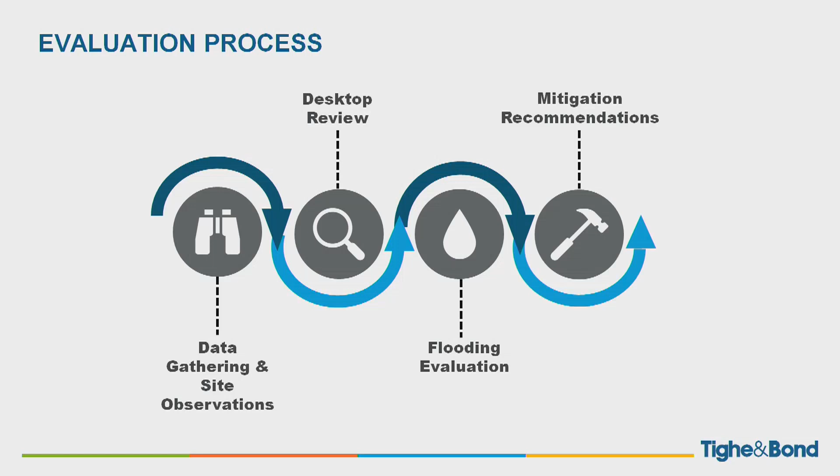So the study area is outlined here in the magenta color. North is to the left. So let me, here we go. All right, so you can see—

This is the Grove-Tilley area down in here. We have Interstate 95 here, railroads up here. So the watershed extends a fairly significant distance upstream.

It extends as far as St. Nicholas Road, which is over in here. And this area is determined by what contributes to the Goodwives River at Old Kings Highway South.

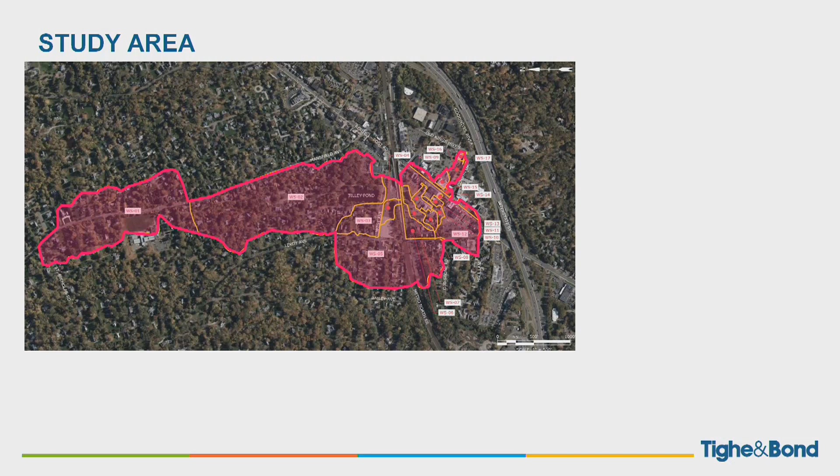The study area itself, everything within that magenta line, is a total of 461 acres. Like I said, it extends north to St. Nicholas Road, and then it includes most of the downtown area that lies between the railroad and Interstate 95. Obviously downtown also extends on the other side, but that's a different watershed.

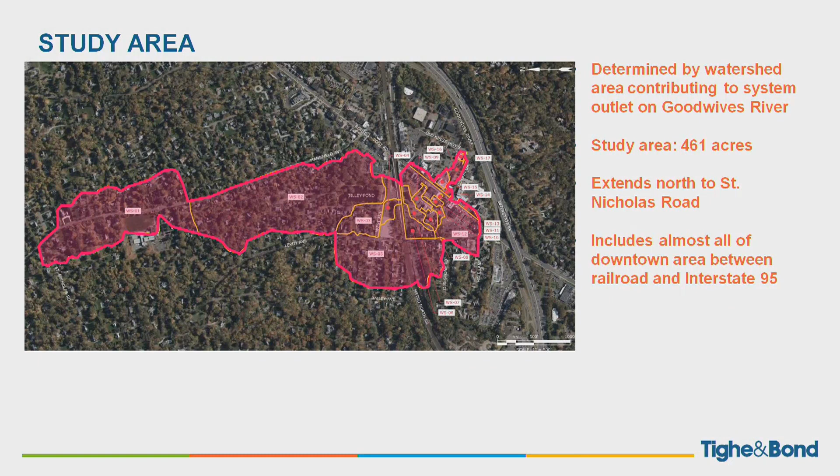So the data gathering consists of, it's like putting pieces of a puzzle together. Some of the things that we look at are the storm sewer maps. The storm sewer mapping tells us how the drains are interconnected, and the sizes of the drains.

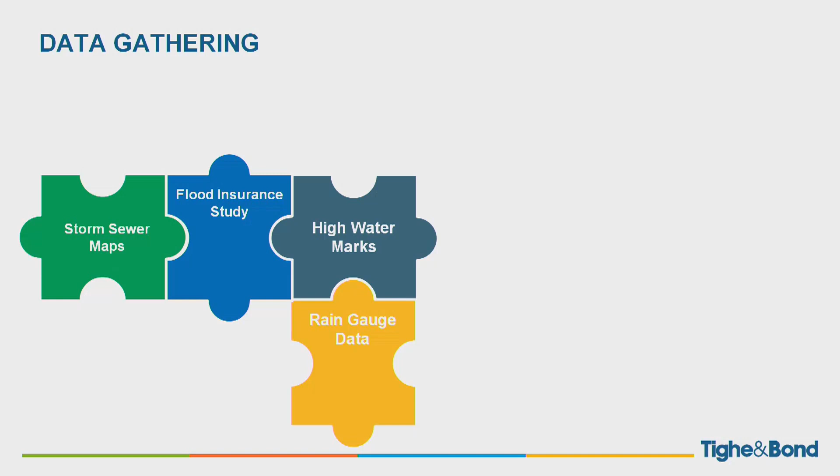We also look at the flood insurance study that FEMA publishes because that indicates areas that are susceptible to riverine flooding. We also look at high water marks to help calibrate the model to ensure that we can replicate a past storm event. We also take a look at rain gauge data to better understand, during the calibration process, how much rain has fallen.

So what kind of storm was it? Was it a 25-year storm? Was it a 50-year storm? Was it something else? We look at the underlying soils. If you have a loose, gravelly soil, you're going to get a lot more infiltration and less runoff than you would if you have a tight, silty soil.

We also look at photos of flooding. That helps us place where some of those high water marks are. There's also field observations when we go out in the field, things that we look at. This also includes videotaping of some of the existing storm drainage lines out there.

Tidal gauge data, not necessarily in this case, but we do need to take a look at the tailwater of the Goodwives River, because the system eventually drains to the Goodwives River. So we need to understand the relationship between the tailwater, how high the Goodwives River gets, and the Grove-Tilley drainage system.

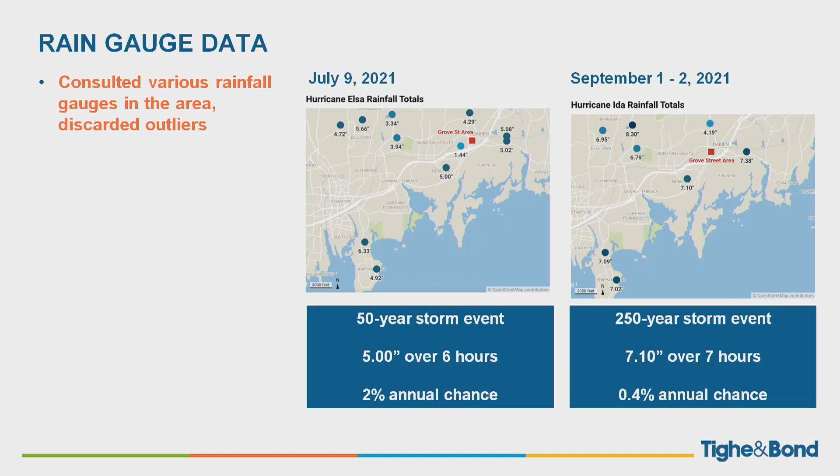So to get this information, we consulted various rainfall gauges from different sources, and we discarded the ones that just didn't seem to make sense. For example, you have 5 inches here, 4.2 inches here, but only 1.4 inches there—something tells me that gauge might have had some issue with it. So we discarded the highs and the lows.

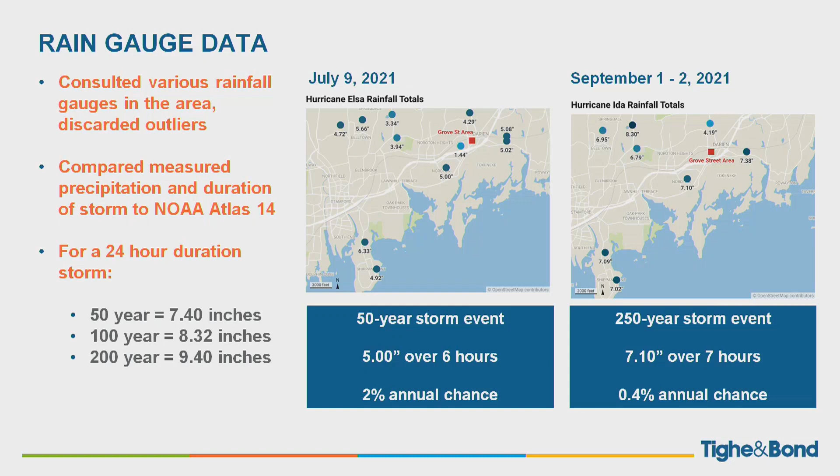And then what we did was we compared the rainfall gauge data to NOAA Atlas 14, which is a current standard that determines what storm event corresponds to what frequency of precipitation. Typically those are expressed in 24-hour duration, so we had to convert from one to the other. For comparison, in a 24-hour duration, 50-year is 7.4 inches of rain in that period, whereas 100-year is 8.32 inches in that same 24-hour period. That gives you a flavor of what it looks like expanded over a full day. And for further reference, 200-year is 9.4 inches in 24 hours.

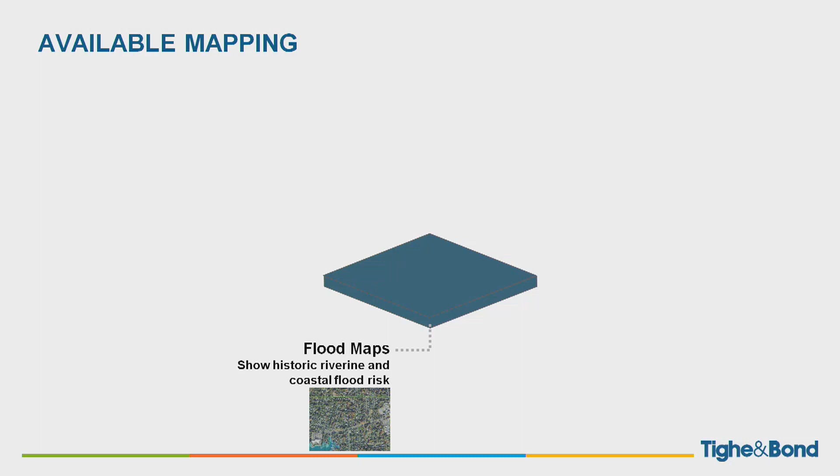So some of the available mapping that we look at include flood maps. The flood maps show riverine and coastal flood risk. We also take a look at soils mapping. The more porous the soil, the less runoff you're going to have, because that soil soaks up the rainfall, whereas if it's tighter, silty, or clay, it's not going to absorb as much, so you get more runoff.

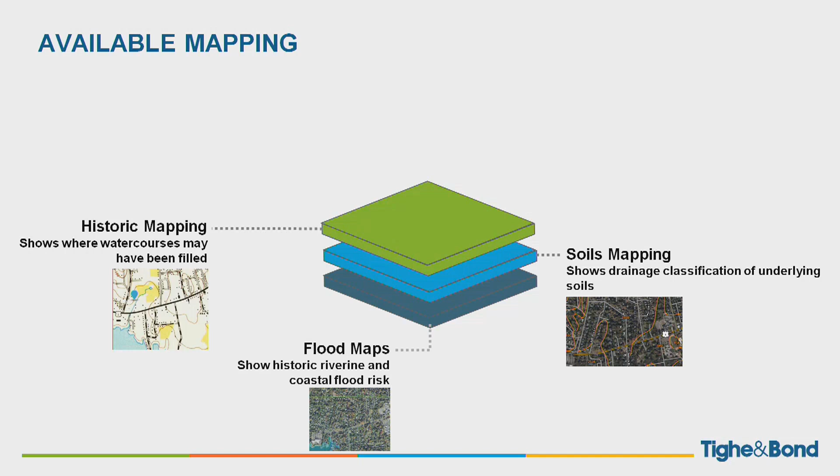We also have historic mapping. We look at USGS mapping, and those tend to show development patterns over time. They go back to 1893, so you can see how things have evolved, and how watercourses were relocated or filled in.

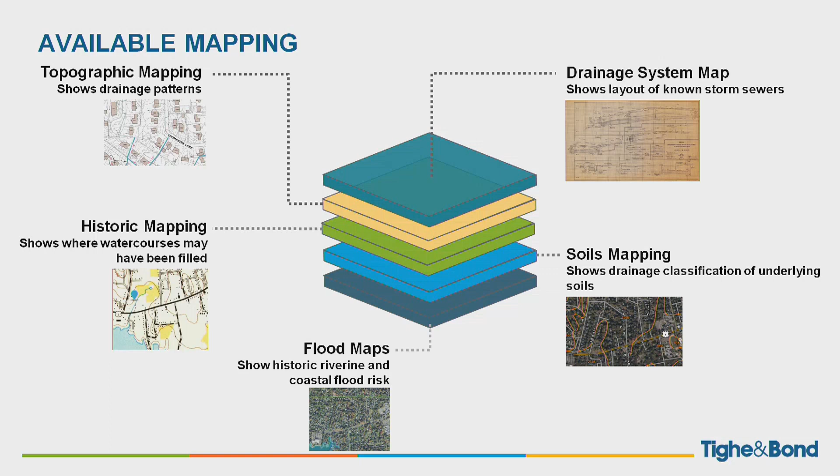And then we also have topographic mapping, that's watershed scale mapping, like the town's contour mapping. That helps us define the limits of our study, what the watershed is. We also have storm drainage system maps that DPW has, which identify how pipes are connected together, how the storm drainage network is built out. So those are the types of mapping that we factor into our analysis.

There is flooding there. The reason is, first, it's important to mention that FEMA's mapping doesn't represent future risk. It doesn't even represent current risk, it represents the risk at the time the map was generated, in this case 2013. And it only shows riverine or coastal flooding, it doesn't show urban flooding. When I say urban flooding, that means drainage from your storm sewer systems, it doesn't map that type of flooding.

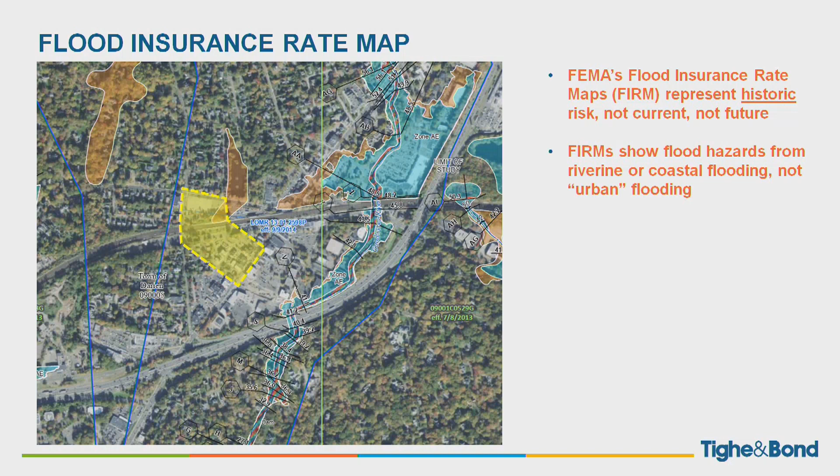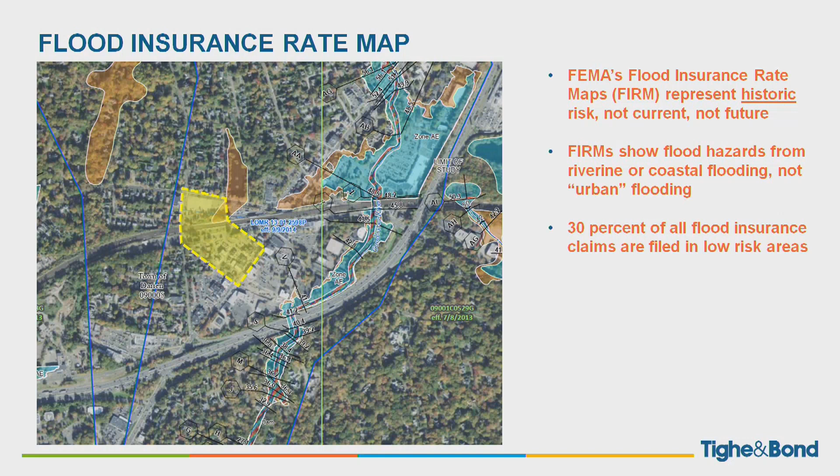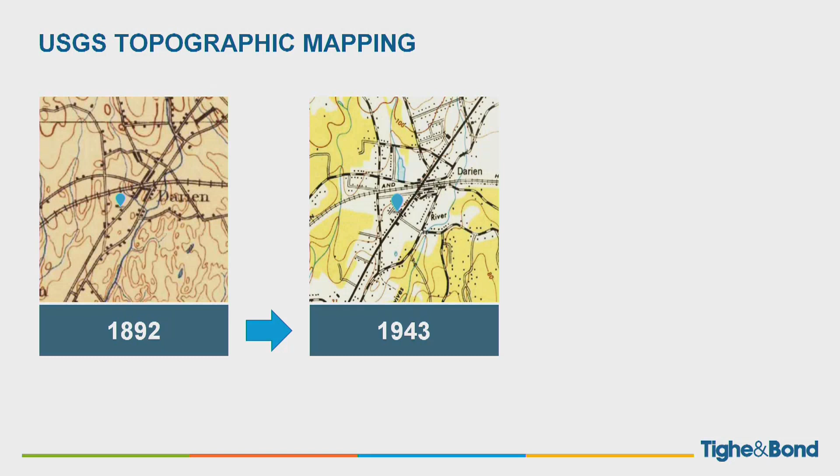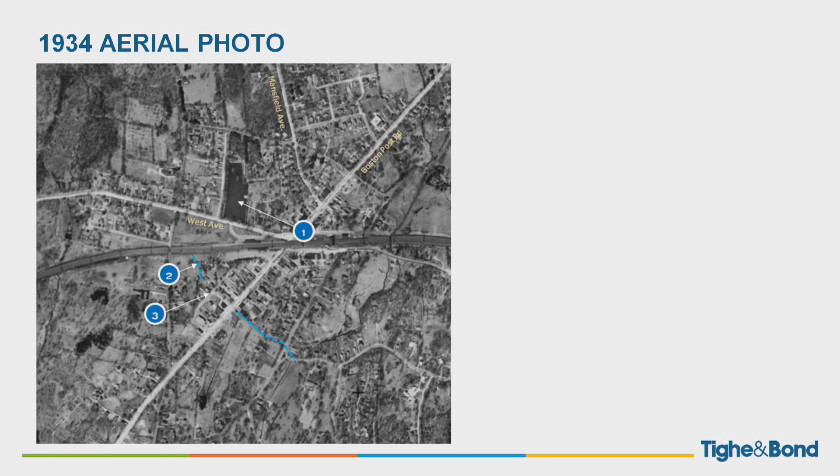And then what we also look at is some of the aerial photos. This is an aerial photo from 1934, the earliest available from the state archives. You'll see a couple of features here: one is Tilley Pond, right there. The second is there's a short section of watercourse that comes out from beneath the railroad - West Avenue is over here, and you'll see it comes through here. Number 3 is actually the Grove Brook Street intersection. This dotted line represents the watercourse, it does come a little bit further down. So it looks like that culverting happened sometime between 1934 and the 1940s.

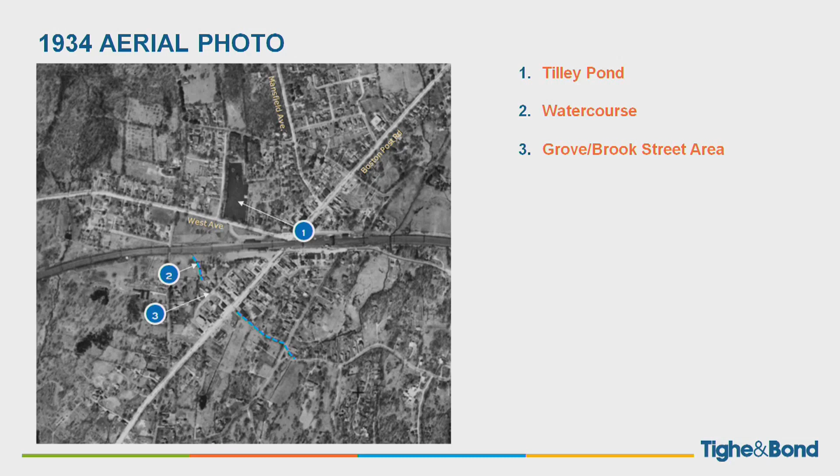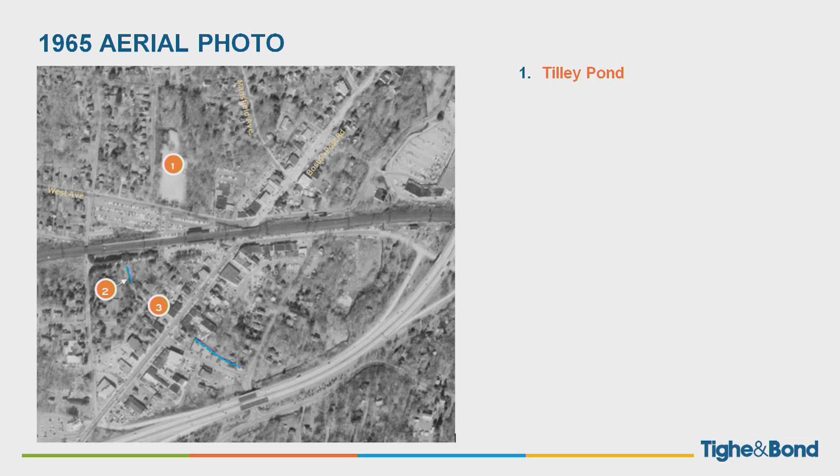So now take a step ahead at about 31 years. It's 1965. Again, number 1 is Tilley Pond, and you can see the West Avenue parking lot here. We've got the railroad, and we still have that short section of watercourse, then it disappears, so it's culverted, with a little more filling down here. So 1 is Tilley Pond, 2 is the watercourse, and 3 is the Grove and Brook Street area.

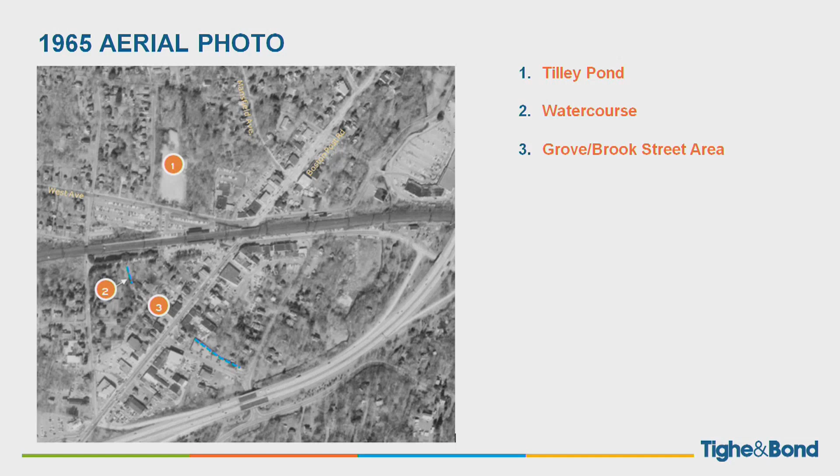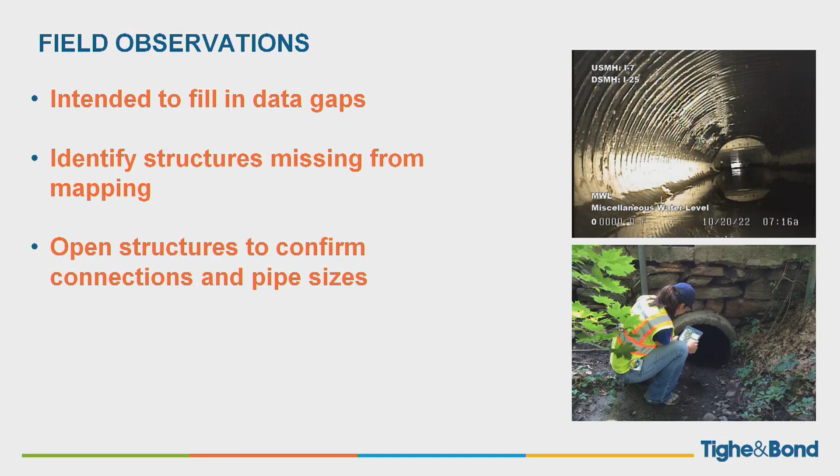The other thing we did was send engineers out in the field to do some observations. We have the mapping, but there are always data gaps that need to be filled in by looking in the field to see what's really going on. That includes identifying structures that might be missing from the mapping, or opening certain structures to confirm connections and pipe sizes, just to see how things are connected if there's a question. Also, in some cases if it's not clear which way things are flowing, we measure down from the top of the manhole to the bottom of the pipe at a couple locations to get a sense of how things flow.

Also, in the upper right, we did some pipe video inspection as well. That didn't turn up anything unusual. There weren't any weird blockages or anything like that.

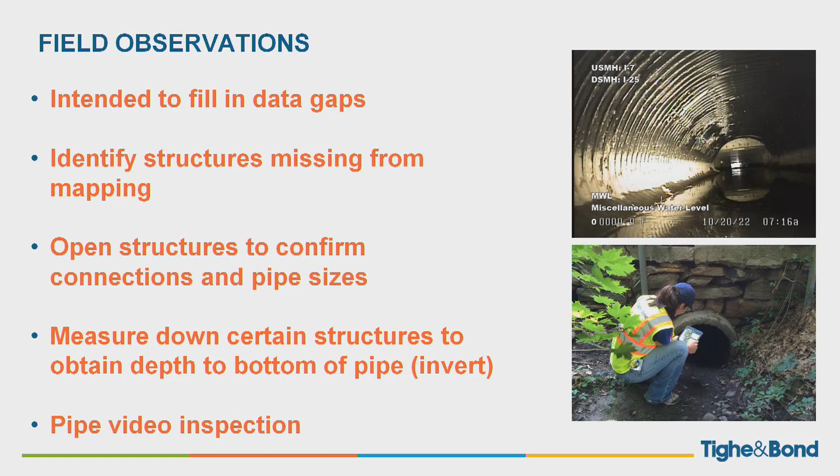So the existing drainage system—I apologize, the background doesn't show up that well, but don't worry, north is to the top. Post Road cuts across here, 95 is down here, Goodwives River is down here, West Avenue is up here, and Tilley Pond is here.

Once it's south of the railroad, it discharges into a short stretch of open channel. I should also point out there's a short stretch of open channel on the north side of the railroad crossing as well.

That is then piped as a 34 by 53 elliptical pipe, opens up into an open channel, and once it gets out near Grove Street, it's piped first as a box culvert, 2 feet high by 5 feet wide, then again down Grove Street as an elliptical pipe, crosses the Post Road, and continues towards Goodwives River, enlarging to a 73 by 44 inch arch pipe, then a 2 by 6 box, and finally twin 29 by 45 inch elliptical pipes.

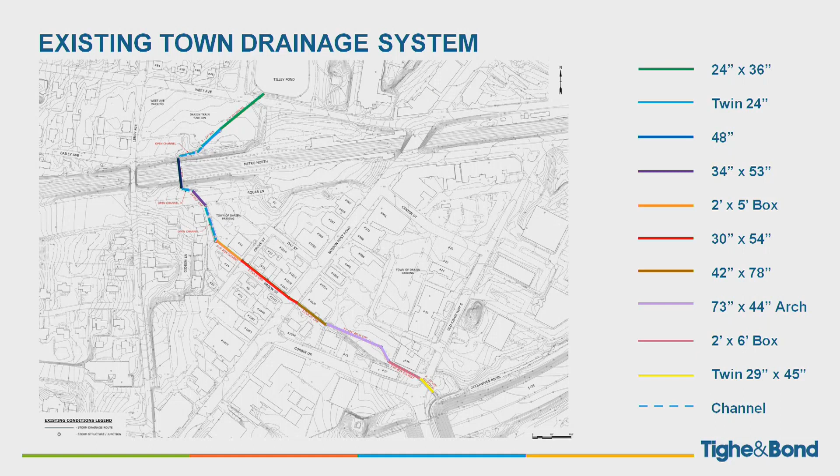So it's definitely an interesting collection of different pipe sizes that in general increase as you move from upstream to downstream, so there is increased capacity.

Based on this information, we have an idea of how the pipe system is connected and know the directions things flow, so we can start to build the model. What goes into that is the information on the drainage system. We look at the watersheds contributing to various parts of the system—we don't look at it as one big lump sum, we break it up into little pieces and then combine them. We start to build out our hydraulic model.

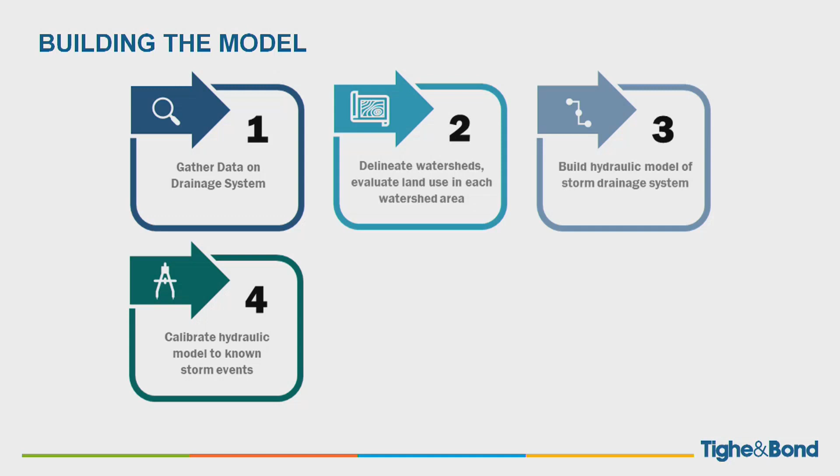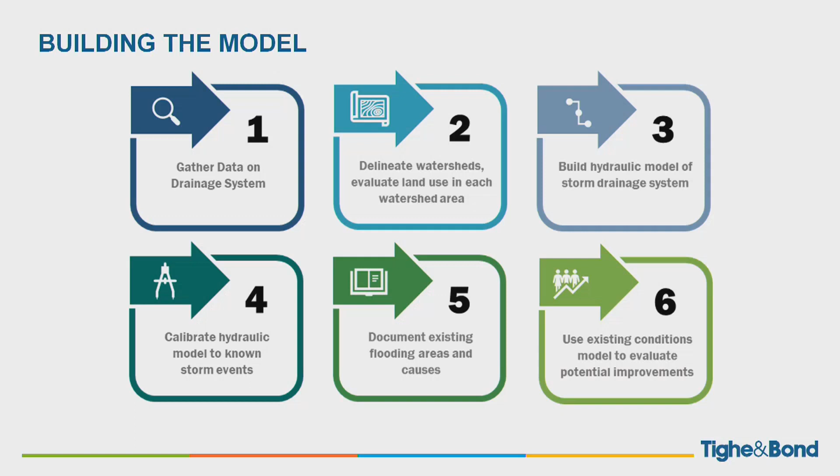Then we calibrate it to known storm events, to make sure it reflects those two storm events we discussed. Then we document the existing flooding areas and potential causes. Using that existing conditions model, we build on that and make modifications to represent potential improvements—maybe we swap out a pipe size, or redirect a pipe elsewhere. That's the kind of thing we do.

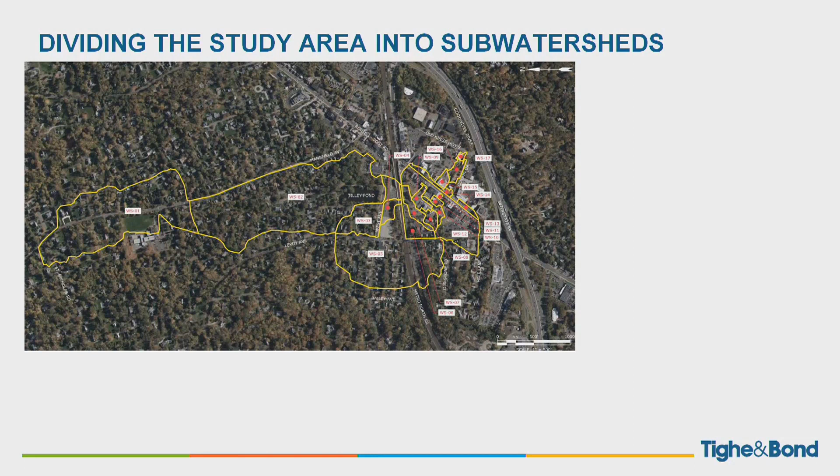So what we did was divide the study area into different watersheds. You'll see those outlined here in the different areas of yellow, just to get a better idea—you have branches that come into the mainline system. That way, if you see something change along the mainline system, you can go back and isolate it to one of these particular smaller subwatersheds. It was divided into 17 subwatershed areas, and again we use that to help isolate where certain problems might be, narrowing down potential problem areas.

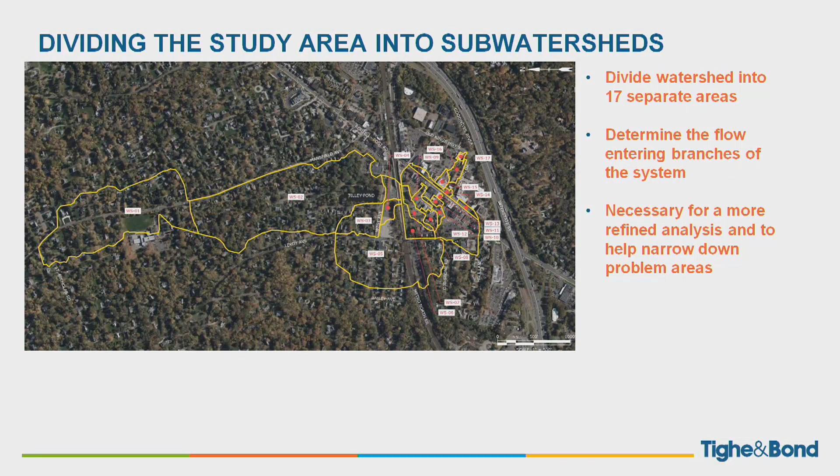Some of the things we look at when we look at these watershed areas are the amount of impervious cover. For example, the more pavement you have, the more runoff you have. So that's something we look at.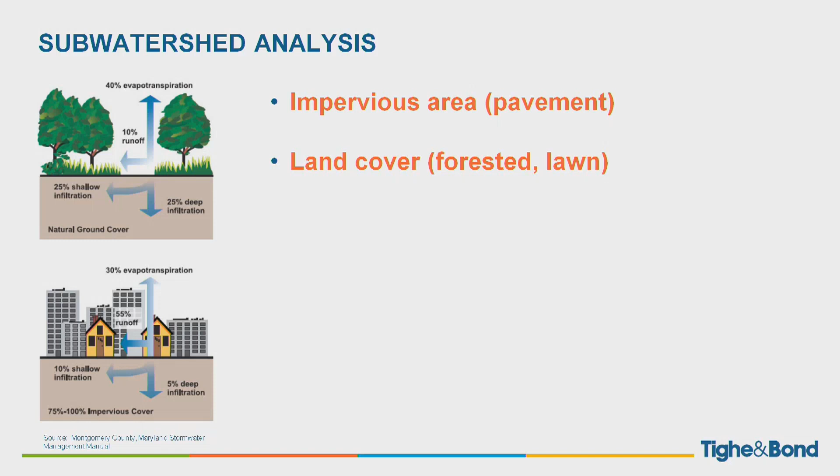We also look at what the land cover is, whether it's forested versus lawn, because those have different runoff characteristics. We also look at the underlying soil types - is it porous, or is it a tight, silty soil? All that influences how much runoff you're going to get in a particular area.

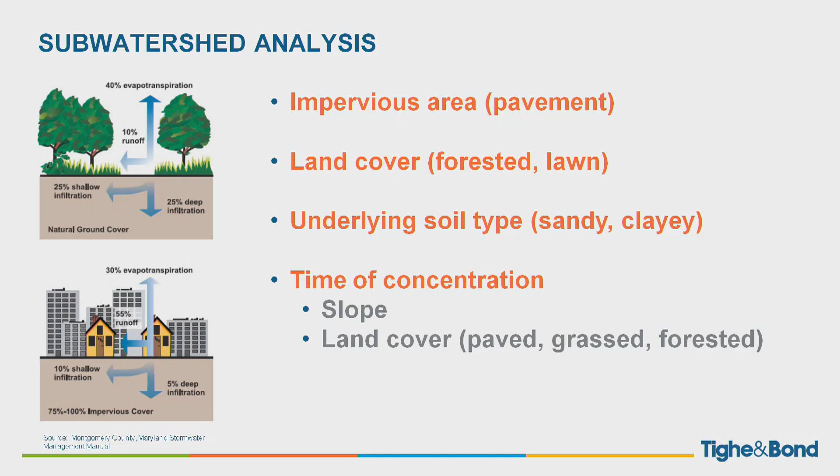And then we look at what's called the time of concentration, which is basically how long it takes for that entire subwatershed area to start contributing flow to the lowest point in that subwatershed. That's based on a couple things: slope - the steeper something is, the more quickly the runoff gets there - and land cover. If it's flowing across pavement, it moves more quickly as opposed to flowing across a forest floor, for example.

Just to clarify, when I say hydraulic model, it's a computerized model based upon different equations and methodologies that have been developed by the Army Corps of Engineers. So it's not like we're gluing things together.

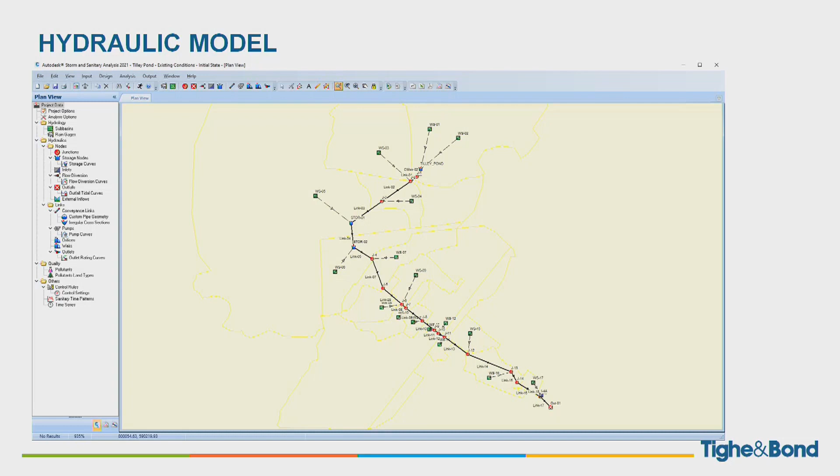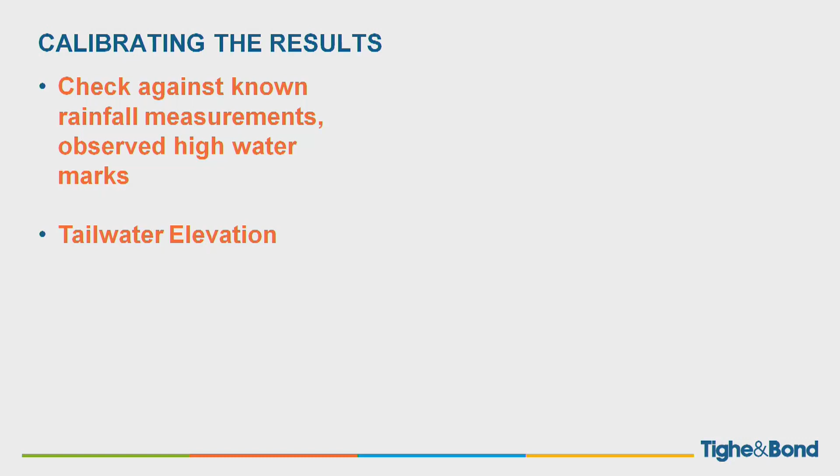It's all electronic. In calibrating results, we check against known rainfall measurements and observed high water marks - how high things got, how wide the flood was. One of the things we also take a look at is the tailwater elevation, to see what the potential condition of the Goodwives River would have been at that particular point in time.

We also take a look at something called antecedent moisture conditions, which is basically how much rain has fallen in the past week to 10 days. Because if soil is super saturated, like it's been raining the past couple days here, the soil isn't absorbing as much runoff as it would under normal conditions. The flip side - if you have a summer like a year or two ago where it was super dry, your soils are going to absorb more runoff than typical.

So that's something we take a look at, and we adjust our runoff coefficients during the calibration process to match what the antecedent moisture conditions were during a storm event. And then we take a look at how well the results align - are we comfortable with the depth and extent of flooding we're getting under existing conditions? And then can we move on to the next step and start making recommendations?

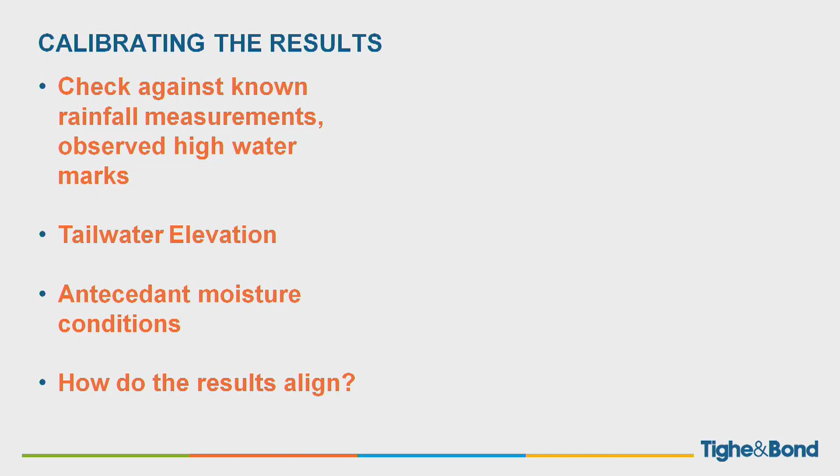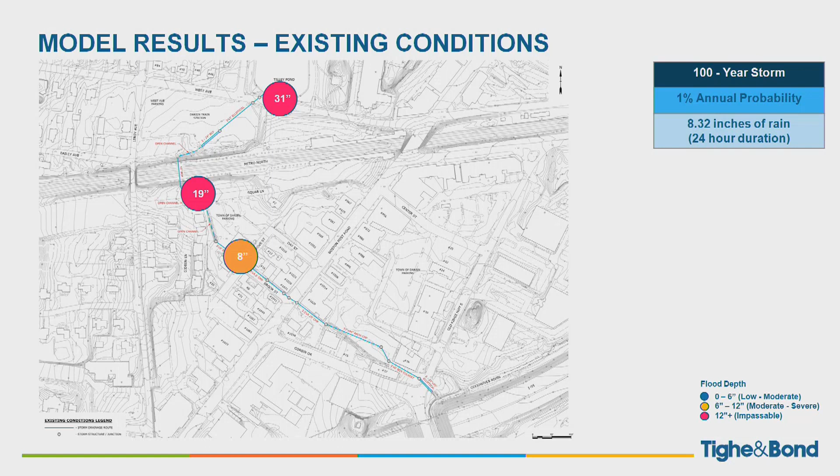So some of the key takeaways looking at the existing drainage system: the system can overtop at a 2-year event. The town's typical design standard is a 25-year storm, and with 50-year design for low points and culverts.

There are multiple choke points in the system, right? There's some inconsistent pipe sizes. You could see there's a lot of hydraulic loss by going from open channel to pipe to open channel to pipe back to open channel again.

The other thing that's a challenge is increasing precipitation depth and frequency, right? We're starting to see more severe storms. We're starting to see greater precipitation depths, and general storms are becoming more intense.

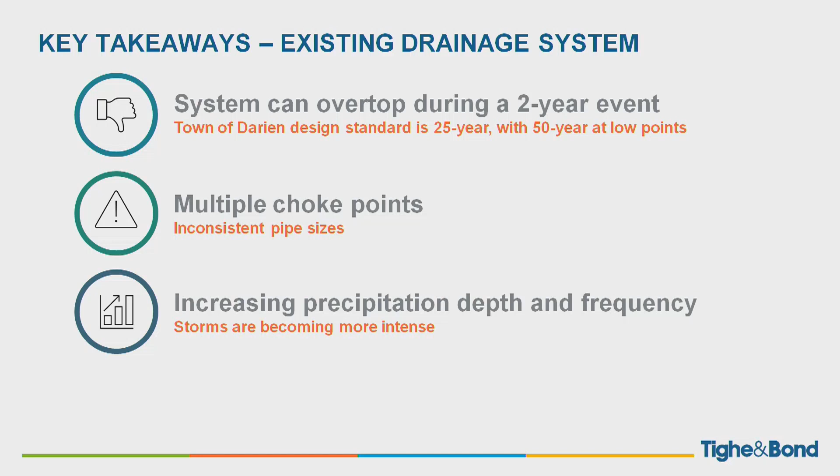But there's also some opportunities for improvement, right? Through our investigation, we found some ways to make the system more efficient, to reduce those flood depths and conform to the current town drainage requirements.

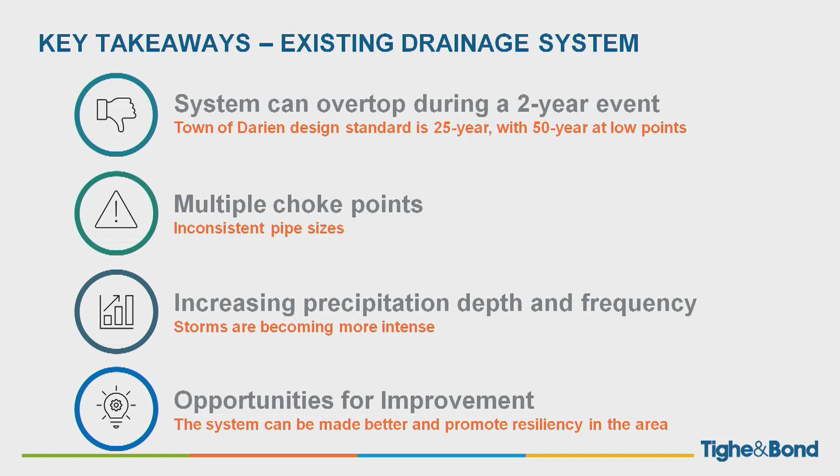The other thing that we're seeing too is the intensity of the storms, right? These are days with rainfall exceeding 1 inch in Bridgeport, and you could see a lot of the peaks have been all within the past 10 to 15 years.

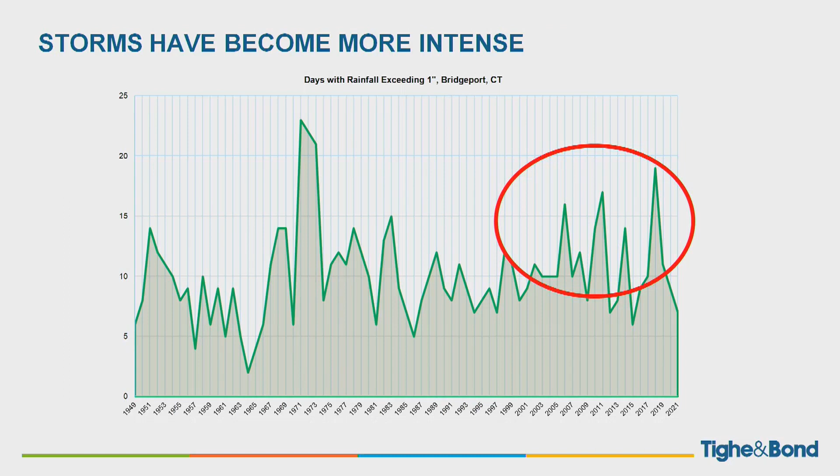Another thing that we're seeing is that tropical storms tend to stay around longer. What appears to be happening is that the forward speed is slowing down, allowing the storms to hang around longer, and the longer they hang around, the more rainfall that they drop.

This table is in our report and identifies some of the more recent events too, along with their speed. But you can see as speed decreases, the precipitation has been increasing.

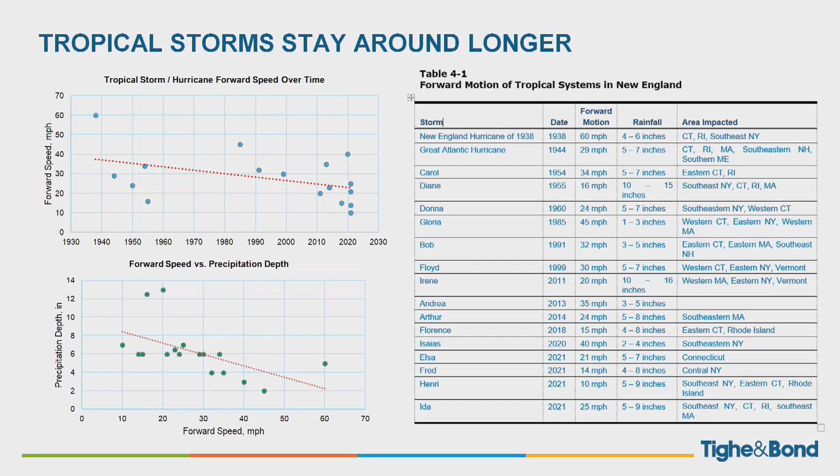Overall, New England is trending wetter. Obviously forecasts are all over the place, but on average, we're looking at a 13% increase in rainfall here in New England by mid-century.

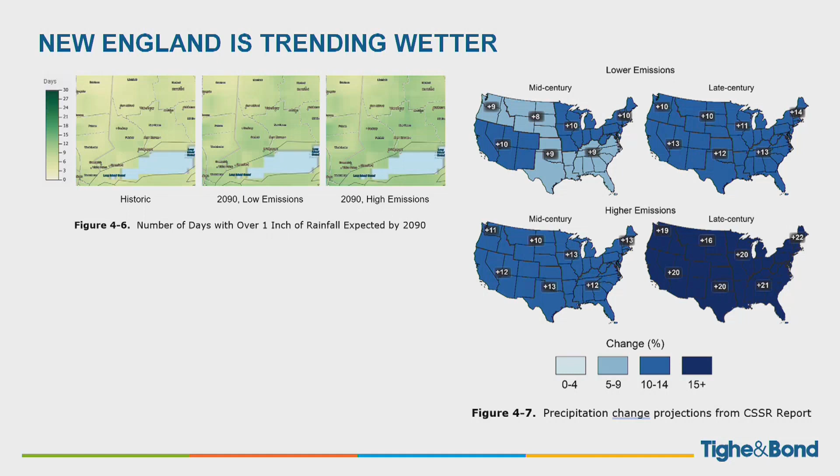Another thing that's happened since the drainage infrastructure was installed or modified is that the drainage criteria has changed. When I first started in 1994, we had used data from the 1961 technical paper number 40 by the National Weather Service. There, the 24-hour storm duration for this area, the 50-year would give you 6.5 inches, and 100-year would be 7.20 inches.

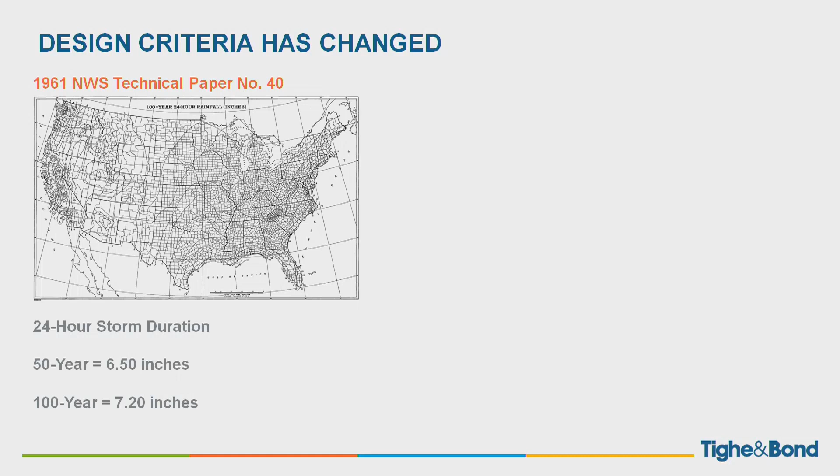That was updated in 2014 based upon the 50-plus years of additional record that was available at that point. In 2015, NOAA came out with its Atlas 14. A 24-hour storm duration for a 50-year event is now 7.4 inches, and the 100-year is 8.32. So basically, the old 100-year storm is now the current 50-year storm, just to show you how things have changed.

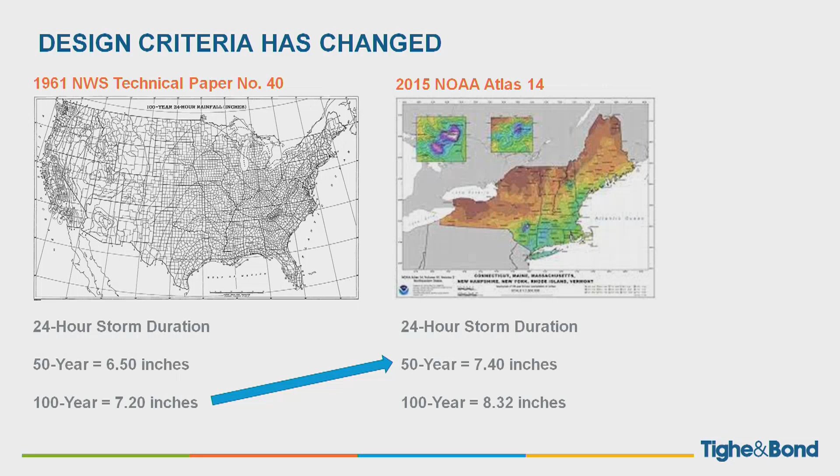So some of our study recommendations. As I go through these, I want to make sure we understand the difference between some of the terminology I use. I tend to talk in a lot of technical speak, but when I talk about concrete pipe, what I mean is reinforced concrete pipe. It's your traditional round pipe, what you'd think of as pipe. It's readily available, easy to install, and it's a lower cost.

You also hear me talk about concrete box culverts. As you would think, the concrete box culvert is rectangular, the shape of a box. Those have a longer lead time, it takes longer to get them. They're more challenging to install just because they're bigger, they have to be winched together. But because it's not round, it provides some additional capacity for the same height. You can get more flow through those.

Again, a little bit more about reinforced concrete pipe. This is the round pipe, a rounded cross section, and it's easier to get. You also heard me talk about elliptical pipe, some people also call this squash pipe. It's an elliptical cross section where it's basically round, but it has a wider span than it does a rise going up and down.

This is often used in areas where there are utility conflicts, if you have to get over or under a certain utility, and also where you have limited cover, because pipes require a certain amount of earth or cover on top of them to avoid damage. So sometimes these are used in those situations, and those are a little harder to obtain than the reinforced concrete pipes.

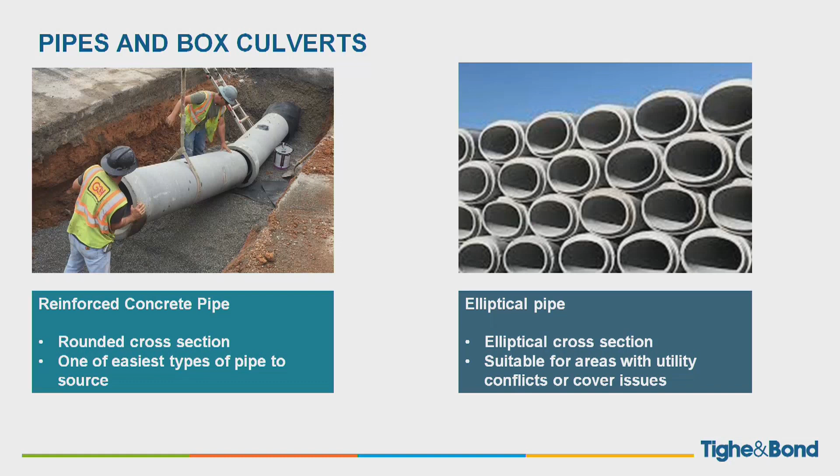So alternate one that we looked at was removing the pipe connection between the two segments of open channel immediately south of the railroad, and then installing a new 38-inch by 60-inch pipe. So that's elliptical, the oval cross-section, coming down Squab Lane, down Day Street, taking a quick jog down the Post Road, working through the Darien Thrift Shop property, and then working its way out toward the Goodwives River.

And what that was, we're looking at a 50-year design event, 2% annual probability, 7.4 inches of rainfall. What we're showing is in the lot, it goes from 27 inches under existing conditions to 18 under proposed. And down near Grove Street, it goes from 16 to 2 inches. So that's a pretty significant improvement, but 18 is not great.

So then we looked at alternate 2. This one, again, is all a 50-year design, which is a town standard. It's at 7.4 inches. What we did look at was removing the pipe. Instead of running it all the way down to the Goodwives River, we looked at running it to the Post Road to meet the existing drainage main line. And the results were actually worse here, which we kind of expected.

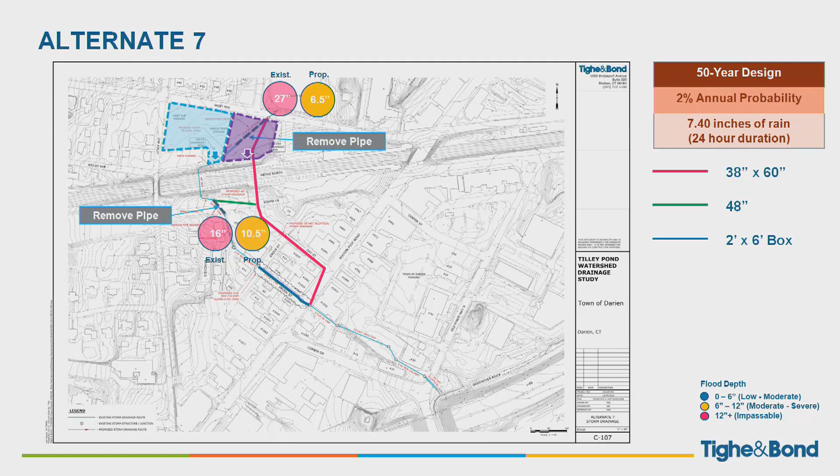And then alternate 8 is where we finally landed, which includes splitting the lot, new drainage pipe, 38 by 60, making its way all the way down to the Goodwives River, basically similar to alternate 1. Removing the pipe that connects the 2 sections of open channel, piping that open channel into the new drainage system, and improving the pipe on Brook Street. And then we're also removing this pipe up here. So we've got 2 fully independent systems when you're up at the lot.

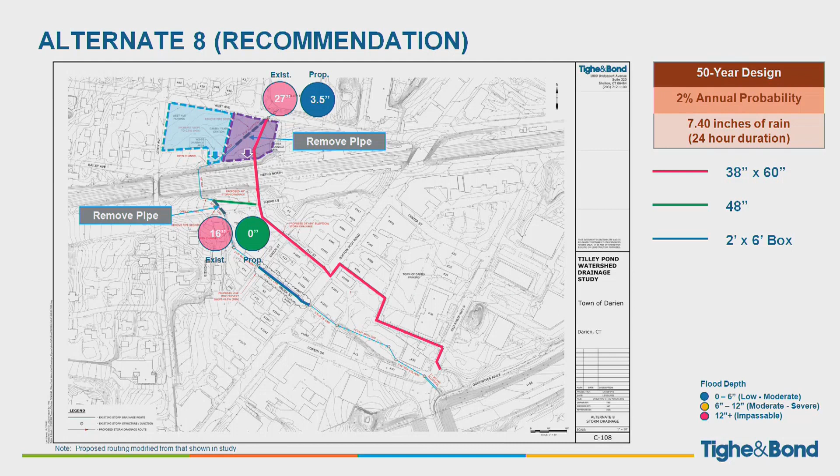So what we did was we compared the different alternatives, 1 through 8, as well as the existing. You can see here the depths at the West Avenue lot. These are the depths at Grove and Brook. And you can see that option 8 is the best of these, offering the most flood relief. But unfortunately, it's also the most expensive. But for 10% more, plus or minus, you're getting a lot more benefit over option 7.

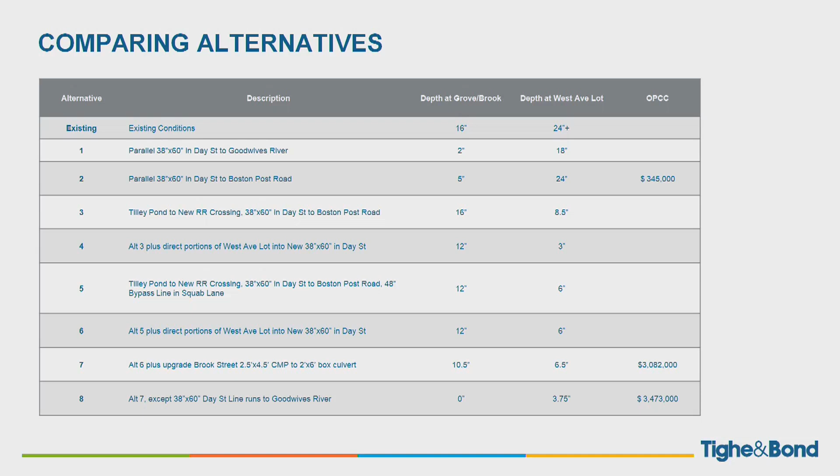So a little bit more about why we chose alternate 8. It exceeds or meets the town's drainage standard. It also provides a factor of safety for the future. It's a significant improvement in roadway flood depth over the 25-year and the 50-year flood events. Flooding is eliminated in the public right-of-way for a 50-year storm. It's also reduced on private property - not eliminated, but certainly made better.

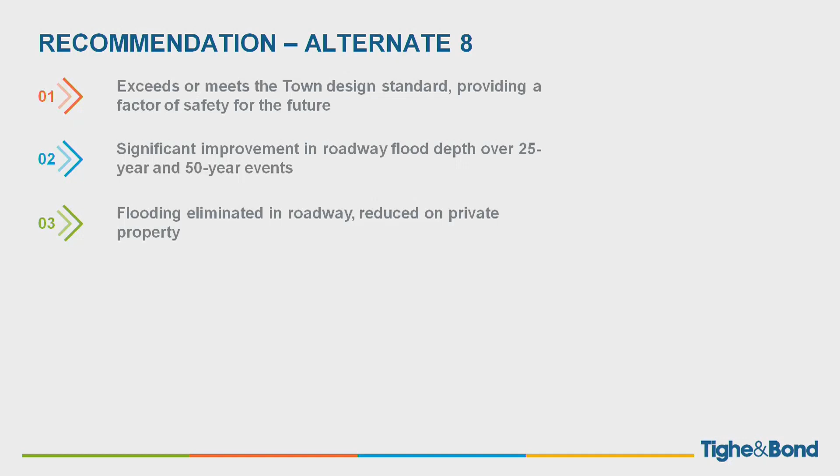One thing to keep in mind is that if constructed, the improvements won't solve flooding forever. There's always going to be potential for a bigger, badder storm event to roll through, but the improvements will reduce the severity and the frequency of flooding, promoting resilience in the area. So why not even larger pipes, right?

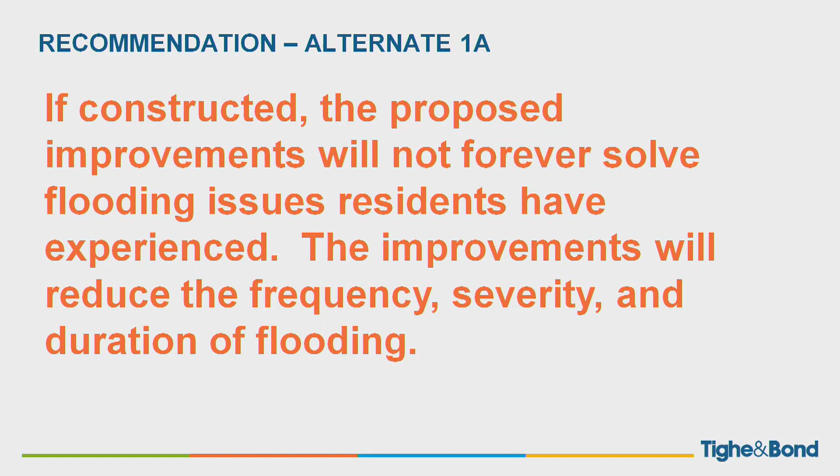If going from a 2x5 box culvert to a 2x6 gets you more flow, why not go even bigger? Well, there are some reasons why you can't or shouldn't do that.

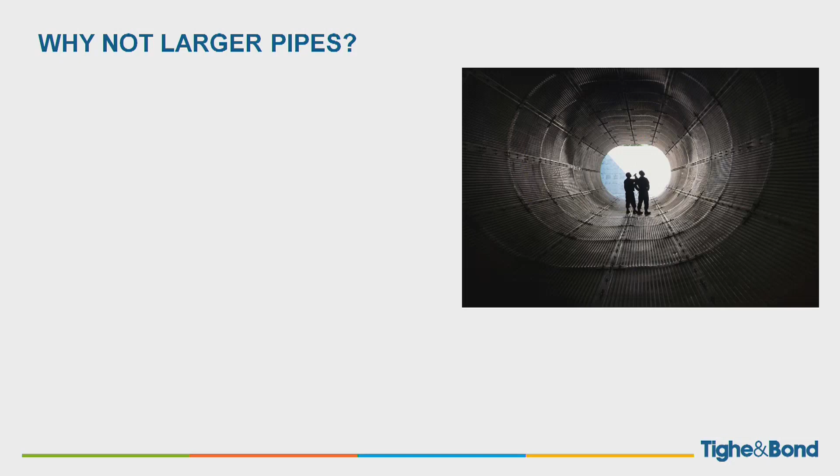First of all, pipes require a minimum amount of soil above them, because you have traffic loading, trucks driving over them. So you can't go up, your only direction to go is down. And if you keep going down, you're not going to be able to meet your slope to get to the outfall, or you might even be lower than the Goodwives River. Then you're looking at a pump situation, which nobody wants. The bottom elevation will get deeper.

It also increases the potential for utility conflicts. A lot of these are tight, constrained corridors. So that's why we try to mimic some of the existing pipe sizes out there, but with different shapes. That's why, if we have a 24-inch pipe, we might go with a box culvert that's 2 feet high, but a little bit wider.

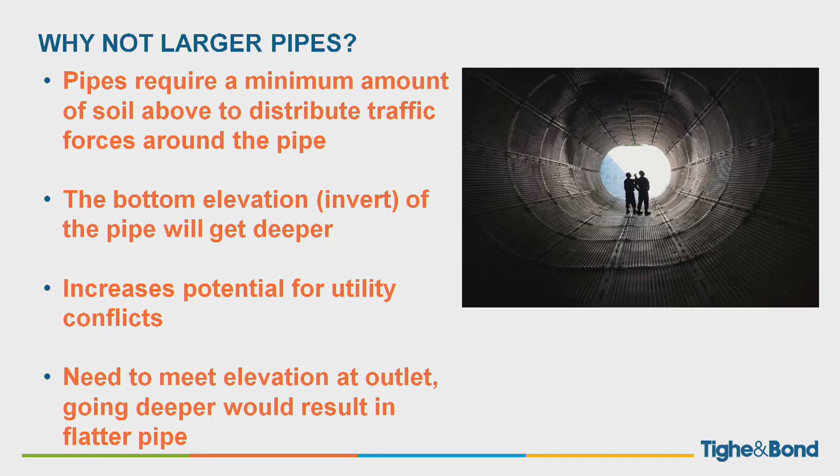You also need to meet the elevation at the outlet. This following graphic shows an example of what could potentially happen. You have your existing storm drainage pipe here in blue. For example, you have sanitary sewers from each of these buildings on the other side that go to the main and the roadway. Now, if you put a larger pipe in there, you can't go up.

Assume you probably have minimum cover here. So what happens with a larger storm drainage pipe, you have a conflict. Not only are you replacing the pipe, you're also replacing the laterals, but what might also happen is the elevations might be such that you can't get under the pipe to your sanitary sewer main. So there's a lot of utility conflict investigation that needs to happen.

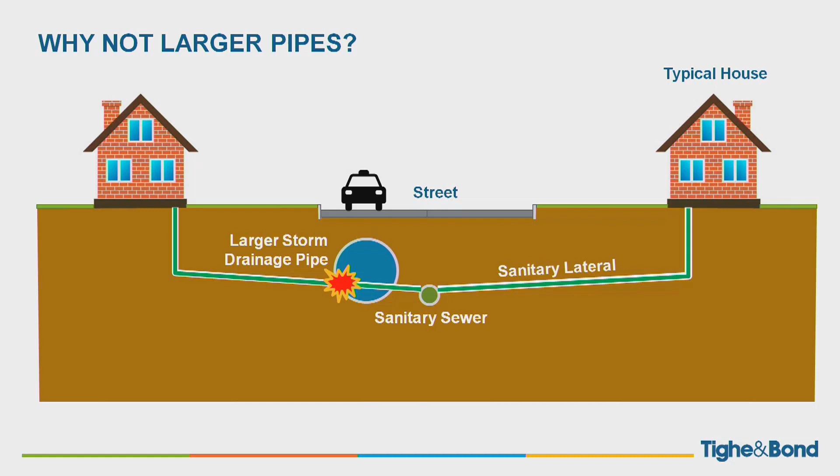One of the questions we had at one of our preliminary meetings with the stakeholders was about how Bailey Avenue connects into the system. What you see here, again, north is to the top. Here's Tilley Pond, Squab Lane, Grove Street, Brook Street.

What you can see here is on Leroy, there's drainage that comes from the eastern end of Bailey Avenue. It connects to Leroy, goes through the lot, beneath the railroad right-of-way, and then down Brook Street. That was accounted for in our model. You can see it here as this blue watershed area, and Bailey is up in here. So we did account for that in our model.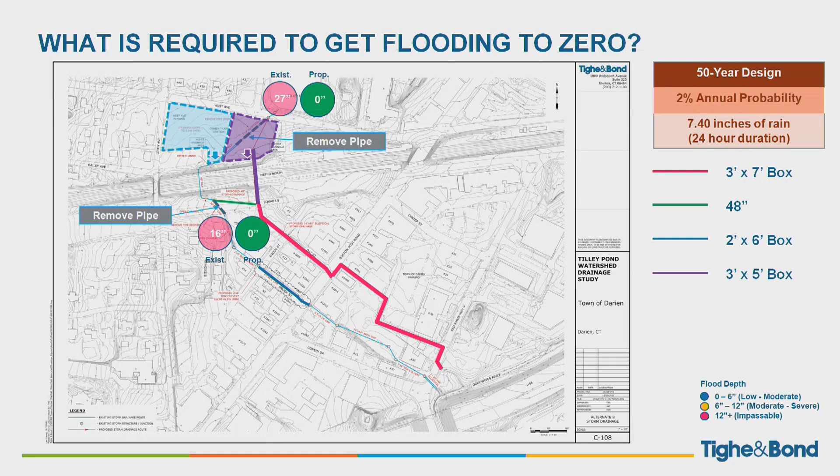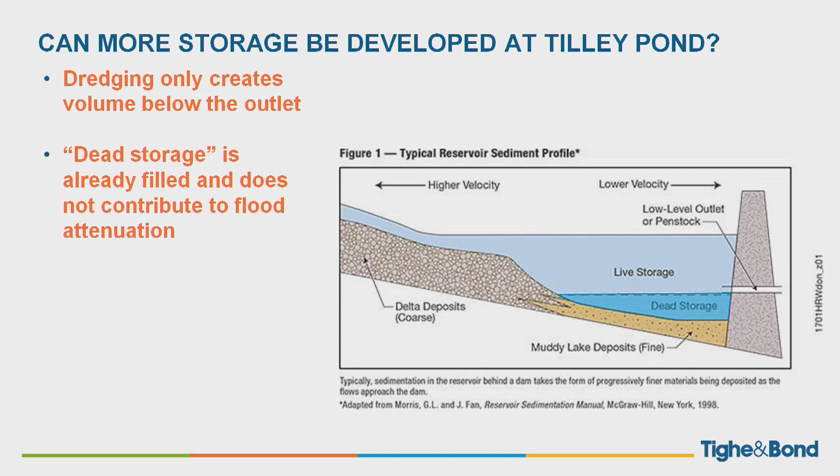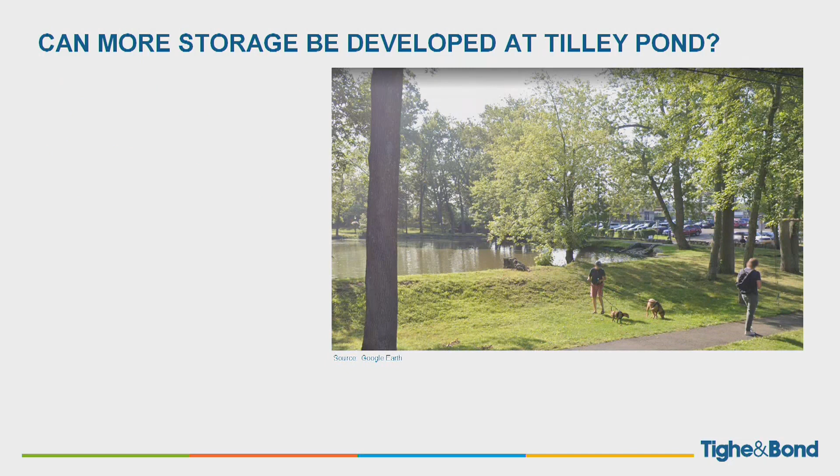Another thing we looked at, this is a picture taken from Google Street View here. We looked at whether you can raise the berms. Yeah, you can raise the berms to create more storage, but as you can imagine, it would negatively impact the aesthetics of the park.

Right, you've already got a berm here, so if you can imagine, there's a couple other issues here, because if you raise the berm, it becomes regulated as a dam, meaning any trees on or near the crest would need to come down, because in the event of a storm, if something falls, you have more water stored behind here, tree falls, the dam goes, and then you have a bigger flooding problem than you would otherwise.

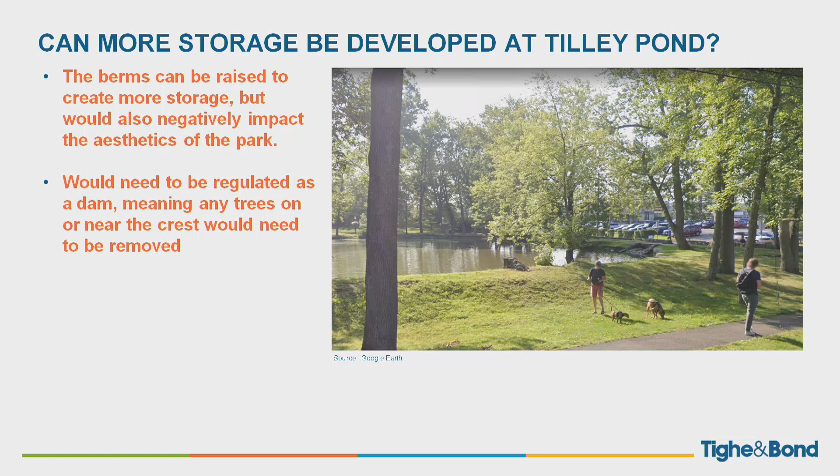And then we did look at, well, how much would you really need to raise them? If it's 6 inches, that's one thing. But we looked at, it was about 6 to 7 feet. So you can imagine, got your nice pond here, nice park, adding another 6 to 7 feet up in here. I think you'd have some people that'd be pretty unhappy, completely, essentially wall off the pond to visitors. So that's why we didn't explore that one any further.

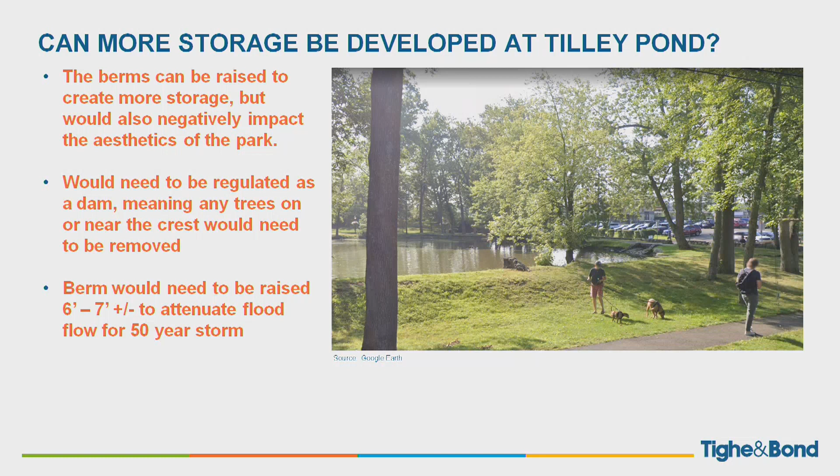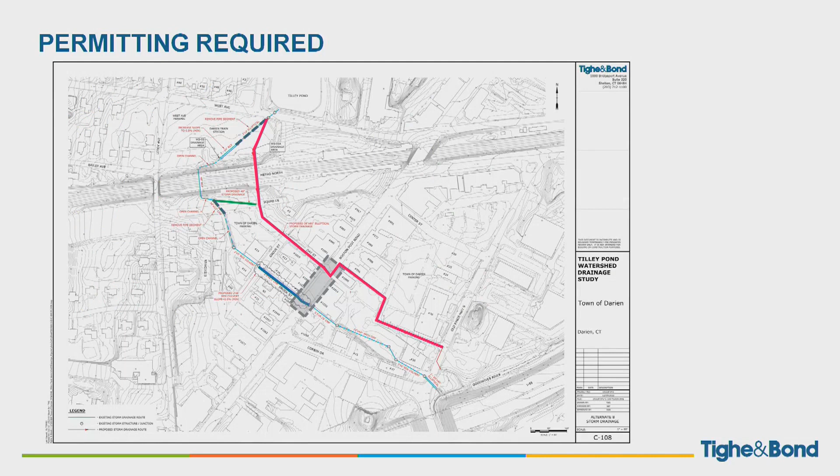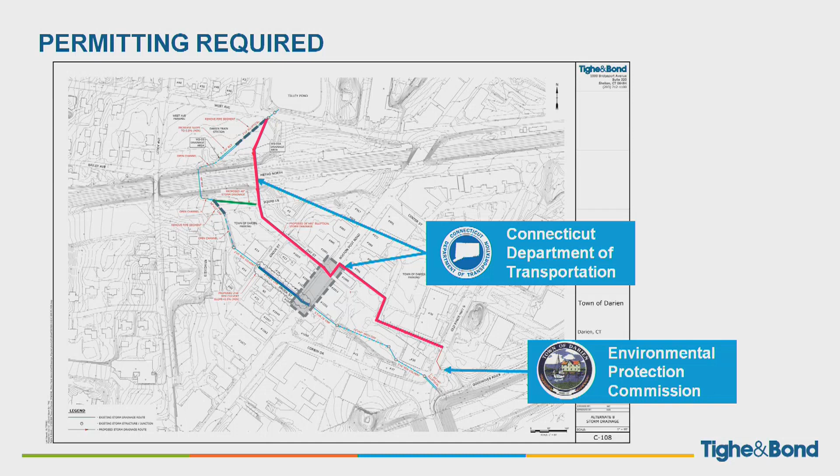So, like anything else, there are permitting requirements, and I'll just give you a quick overview of what those are. This is for alternate 8. Because we're doing work at the Goodwives River outfall, that would require approval of the Environmental Protection Commission here in town. Not so bad. But we're also doing work in the state right-of-way, both Boston Post Road, that's a state highway, as well as the railroad. Those are both owned by DOT, so we'd have to go through them for an encroachment permit. So the level of pain is taken up a few notches.

And then for the ultimate in pain is working with Metro North. It's a very rigorous process, very intensive. Doesn't mean it can't be done. It just takes some time to get through the process. So that's what we're looking at for permits.

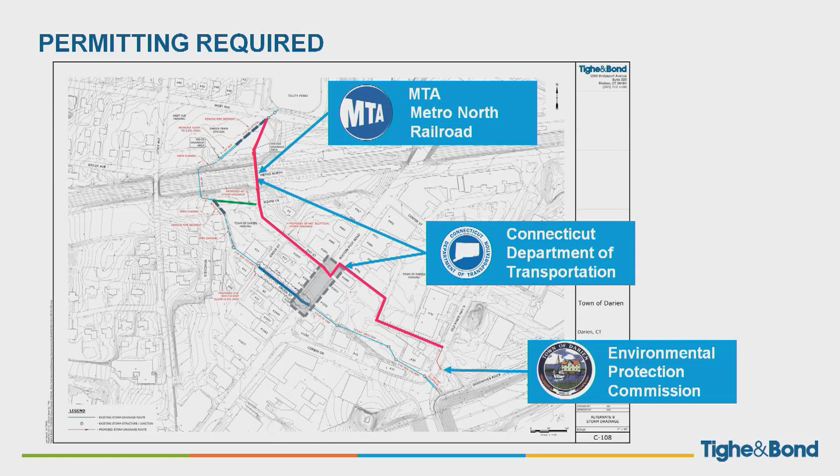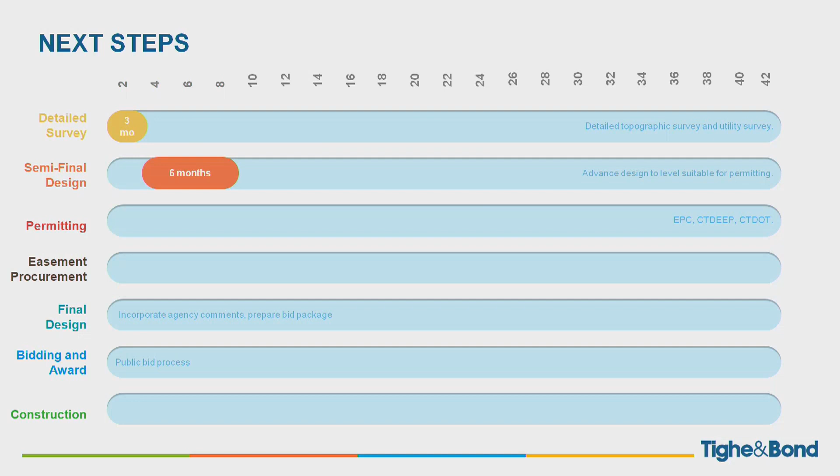And then next steps. So if this were to proceed through design and construction, what we anticipate is about 3 months for a detailed survey, 6 months for a semi-final design, enough for permitting level discussions, 9 to 15 months to work your way through the permitting process. And then we also have to get easements, since we're proposing some work on private property. That could take a while to get through those negotiations.

Final design, a lot of that can happen concurrent with the other two, but you need the results of the easements and the permitting to finalize your design. That'll be about 3 months, about another 2 months for bidding and award, and then construction, probably about 12 months. So, all said and done, we're probably 42, 43, 45 months out. So it's a long process. So that concludes my presentation.

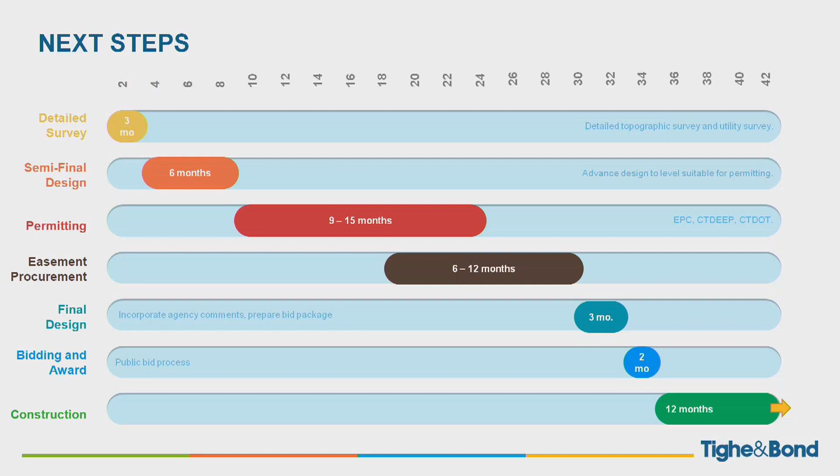This by far, I think, is the biggest unknown. To the extent that we use our collective efforts to push the agencies, combined with stakeholder and local political power, I think that would certainly help contract that timeline. But unfortunately, the permitting is just a big variable.

Oh, sure. And I am Shed Glassmeyer of 8 Woods End Road.

I didn't mention that. What about precedents as far as making new crossings through the railroads, that sort of thing? Not crossings, but boring holes, what have you. Are you familiar with areas that have had success with that? You mean boring the hole under the railroad? Yeah, right. Well, we wouldn't do that. There are specialty firms that do that sort of work, that design that.

But are you talking about the design or the actual process of doing that? Just how often it's happened on Metro North. I can't tell you how often that's happened. I know we worked with someone on a project in Westport that did some boring, but it was beneath 95 and not the railroad. I'd have to look into that. I unfortunately don't have a frame of reference for you, but I can ask around and find out.

Thank you for the presentation. My name is Rolf Oben. I live at 9 Archer Lane. I'm also a member of the Public Works Committee at RTM. I have essentially one question relating to the scope of the project and the timeline.